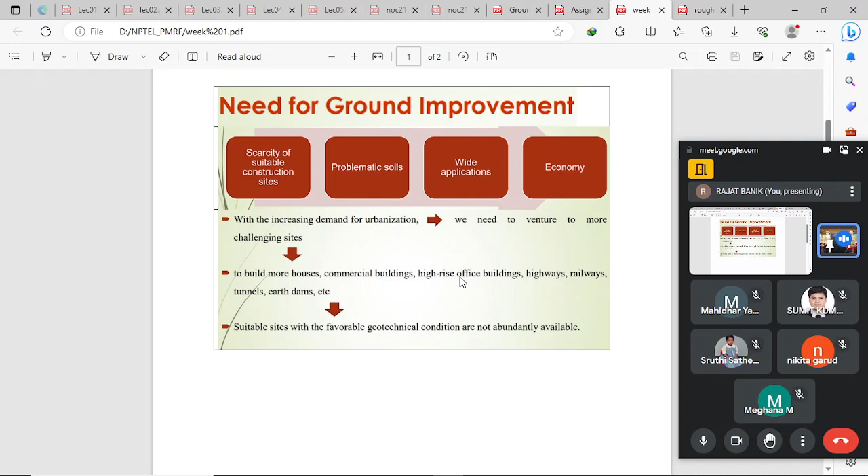For engineering purposes, why do we need ground improvement? Actually, we need ground improvement to increase the mechanical properties of the soil, because some soils do not have adequate mechanical properties. Also, we deal with swelling and shrinkage of soil, collapsible soils, soft soil, organic soil, peaty soils, sandy and gravelly deposits, karst deposits with sink formation, foundations on dumps and sanitary landfills.

We also deal with handling dredge material, handling hazardous materials in contact with soil, and use of minefields. So every problem we face, we can address by ground improvement techniques. We can come to that.

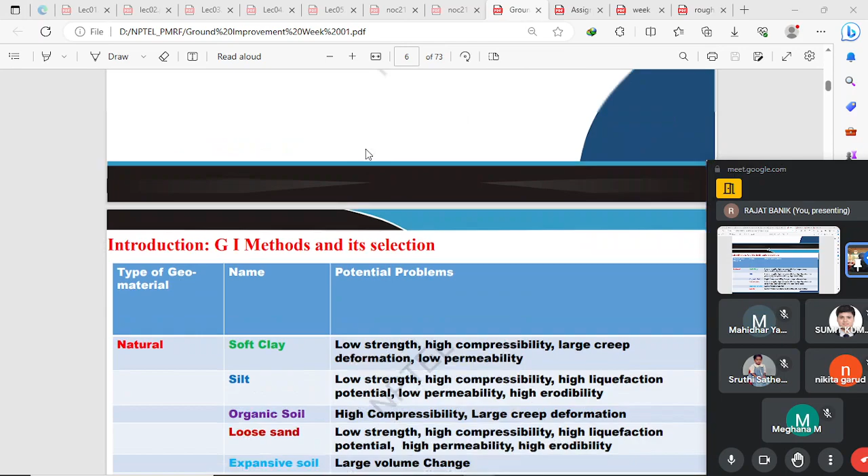Now I am discussing the material which is already shared with you on the NPTEL portal by Professor Dilip Kumar Sir, and I am summarizing this material going through that PPT. First, we can start with the introductory part of ground improvement.

We can see that like every civil engineering material, soil is also one of the civil engineering materials, like steel or concrete. But in the case of soil, it is very dynamic, and it is not properly addressed sometimes. In the case of steel or concrete, we can manufacture it in a laboratory or in the field with quality control technique. But in the case of soil, addressing it is very difficult because it is huge in quantity. So for that, we can use some improvement technique to improve our soil.

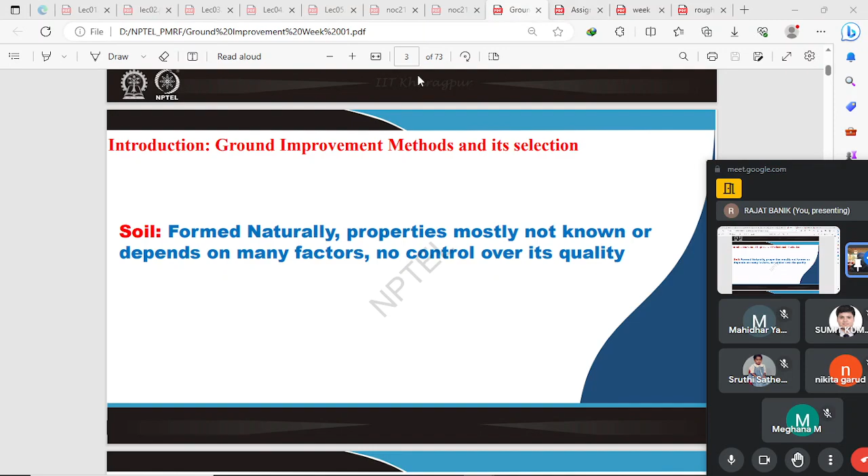Actually, soil forms naturally, and its properties are mostly not known, depending on many factors, with no control over its quality. Here we can see some rock cycle, how soil is formed.

4.5 billion years ago, our earth was in a gaseous stage. After cooling, it went to molten magma. After further cooling, it became igneous rock. With further weathering, it becomes residual soil, and with further heat and pressure, it becomes sedimentary and metamorphic rock. This means the formation of soil depends on different mechanical and chemical properties, so it itself is a dynamic process. So for every different soil, we can use different ground improvement techniques.

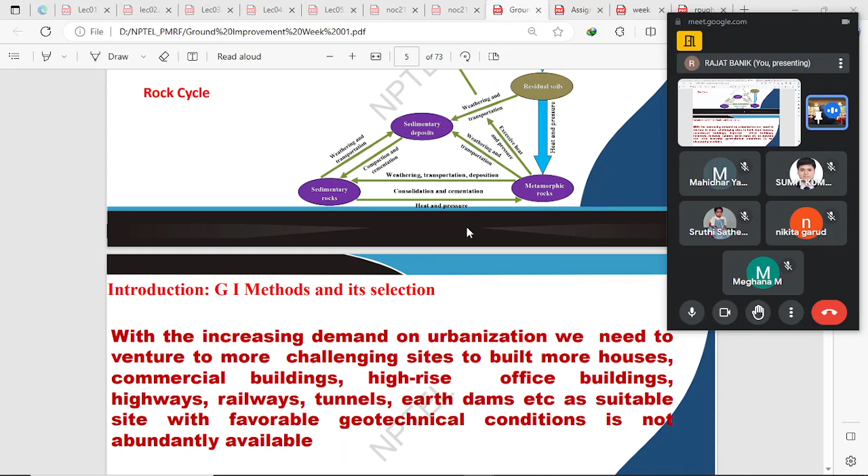Now, why is it needed? As I already told you, with the increasing demand of urbanization, we need to venture into more challenging sites to build more houses, commercial buildings, high-rise office buildings, highways, railways, tunnels, dams, etc. For that, suitable ground favorable conditions are not abundantly available.

Here we discuss some types of geomaterial or soil which is available, or problematic soil, which is addressed by ground improvement techniques. First we discuss natural soil. The naturally available soils which are problematic in ground construction are soft clay, silt, organic soil, loose sand, expansive soil, and loose soil.

What are the major potential problems? This is also discussed here. In case of soft clay, it is very low in strength, high compressibility, large creep deformation, and low permeability. In silt, it is the same: low strength, high compressibility, high liquefaction potential, low permeability, high erodibility.

Organic soil has high compressibility and large creep deformation. Loose sand has low strength, high compressibility, high liquefaction potential, high permeability, and high erodibility.

Actually, this table is very important for your exam purpose and also to solve the assignment problems. Each and every point is very important to solve the assignment.

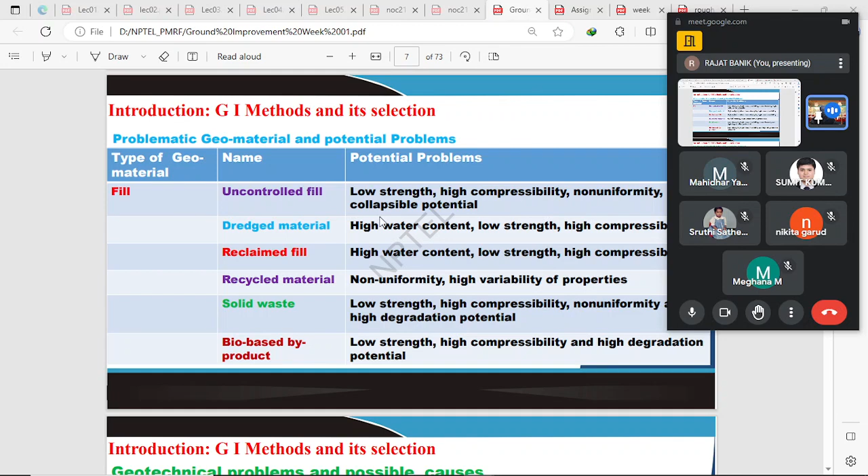There is another problematic geomaterial or soil, that is fill. There are different types of fill material: uncontrolled fill, dredge material, reclaimed fill, recycled material, solid waste, bio-based byproduct.

In uncontrolled fill, the problems are low strength, high compressibility, non-uniformity, and high collapsible potential. In dredge material, the problems are high water content, low strength, and high compressibility. In reclaimed fill, there is also high water content, low strength, and high compressibility.

Recycled material, which is available in abundance, when dumped at a site during construction, creates huge non-uniformity — that is one problem. Then high variability of properties is also one of the problems. In solid waste, which comes from our houses and also from factories and is dumped on a site near which buildings are constructed, this is also going to be a problem. There the problems are low strength, high compressibility, non-uniformity, and high degradation potential.

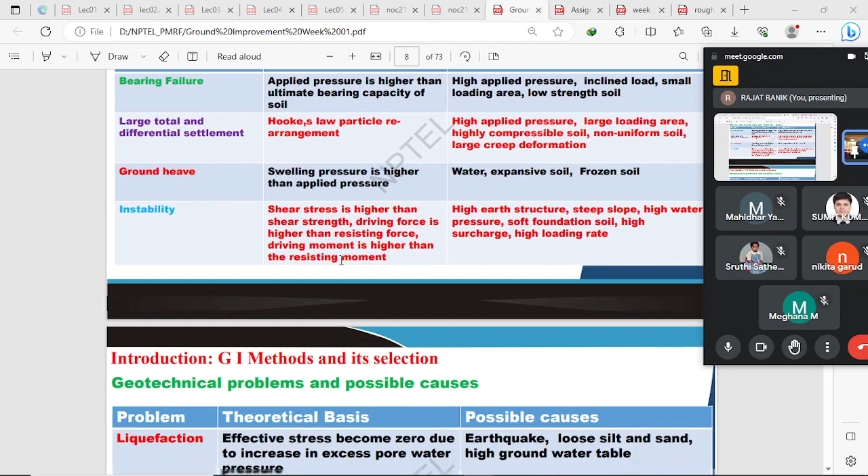The bio-based product also has low strength, high compressibility, and high degradation potential. Moving ahead, there is a table showing the geotechnical problems and their causes, showing the different problems, their overall causes, and the theory behind each problem.

First is bearing capacity failure. This occurs when the applied pressure is higher than the ultimate bearing capacity of soil — that means when the pressure coming from the building is higher than the resisting soil pressure, then failure of the foundation occurs. Some possible causes discussed here are when the applied pressure is very high, the load is inclined, the load is applied on a small area, or the strength of the soil is very low.

Again, other problems are large total and differential settlement. This follows Hooke's law and also the particle rearrangement phenomena. Due to that, volume changes occur and settlements take place. It is caused due to high applied pressure, large loading area, highly compressible soil, non-uniform soil, and large creep deformation. Ground heave takes place when the soil's swelling pressure is higher than the applied pressure.

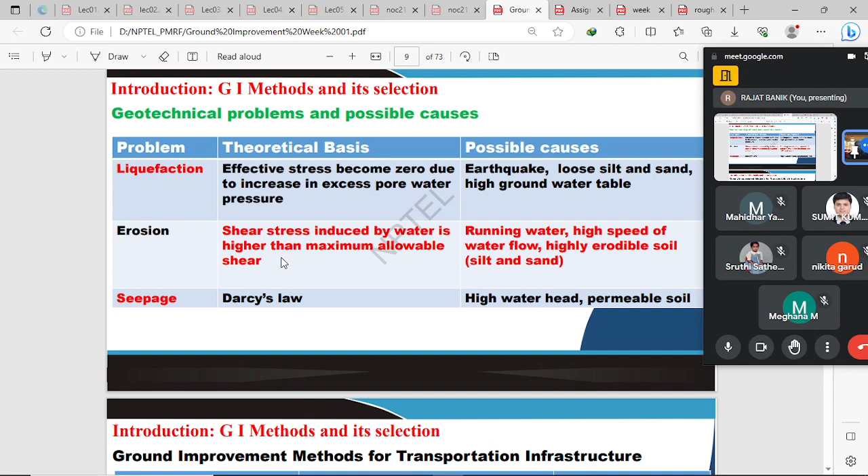There are some techniques used in ground improvement, which is used in transportation infrastructure. These are aggregate columns, waste materials, electroosmosis, micropiles, biotreatment for subgrade, blasting, densification, chemical grouting, and many others, which we will discuss step by step in the next few slides.

Now, in module 2, sir will discuss different classifications of ground improvement methods given by different scientists based on their own criteria. First is given by Mitchell in 1981, based on construction or function criteria. It is categorized into six: in-situ deep compaction of cohesionless soil, pre-compression, injection and grouting, admixture, thermal, and reinforcement.

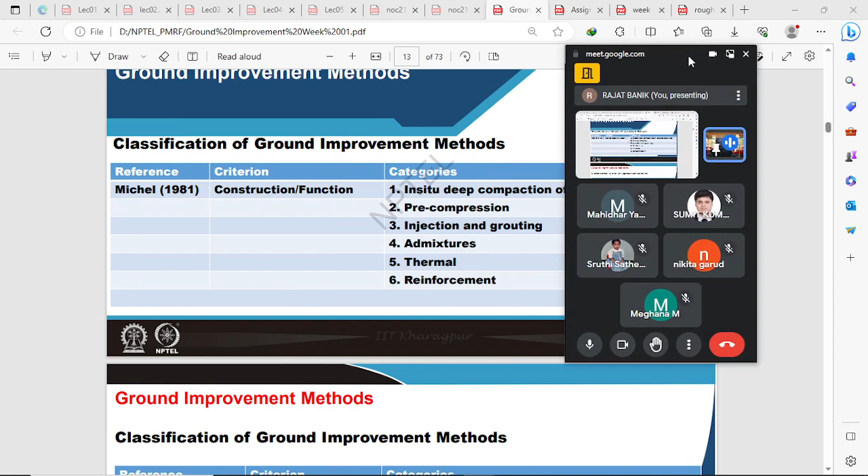More scientists also classified ground improvement methods based on their own process or criteria. That is, Hausmann 1990, based on process. He categorized ground improvement techniques into five: mechanical, meaning we can improve the ground by mechanical energy.

Hydraulic modification, that is, by dewatering or drainage we can improve ground. By physical or chemical modification, we can physically replace the problematic soil with good soil, or by chemical modification through grouting or chemical admixture we can improve the ground, or by some inclusion or confinement, meaning we include rods or reinforcement in the ground to increase the tensile strength of the soil.

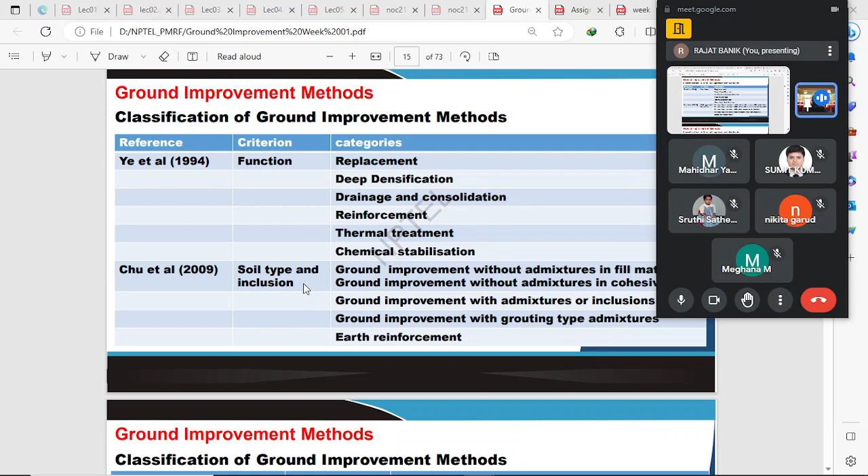Soil is very poor in tension, so we can address this by inclusion and confinement. Further, there are others like Ye et al. and Chu et al. who have also given different ground improvement classifications based on function and soil types, which you can go through and memorize.

Now we can classify ground improvement techniques by our own perception, that is shallow replacement, shallow densification, deep densification, deep replacement, and so on. We can discuss everything step by step.

First, shallow replacement. By the name itself, it is clear that we replace material up to shallow depth. Here in ground improvement techniques, we can replace soil. In shallow replacement, the method is called over-excavation and replacement, which is widely used up to shallow depth. We remove the problematic geomaterial and replace it with good quality geomaterial.

Benefits are increased strength and stiffness, and reduced deformation, liquefaction, collapsible nature of the soil, and ground heave. It is applicable when the replacement depth is up to 3 meters deep, and it can be applied to almost all types of geomaterial.

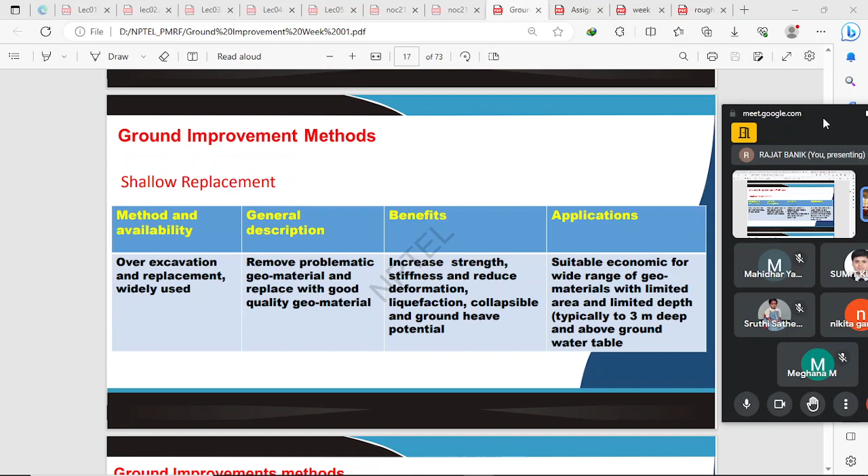Moving ahead, there is another ground improvement classification, that is shallow densification. In shallow densification, there are three methods: one is traditional compaction, which is widely used; another is the high energy impact roller; and the last one is intelligent compaction, which is new and not readily available.

In traditional compaction, we apply static or vibratory load on the ground surface in a certain number of passes. Each pass improves 0.3 meter thickness. Benefits are it increases density, strength, and stiffness, and reduces the permeability and collapsible nature of the soil.

It's suitable, as I told before, up to 0.3 meter depth per pass, and it is normally used only for finishing purposes in roads, mainly for leveling the ground. In the end, if we finish leveling the ground, we can use traditional compaction widely.

In high energy impact roller, we apply a lifting and falling motion of a roller with high energy impact. Due to the high energy, the ground surface is densified, compacting the problematic geomaterial. The benefits are similar to traditional compaction, but the improvement depth is higher.

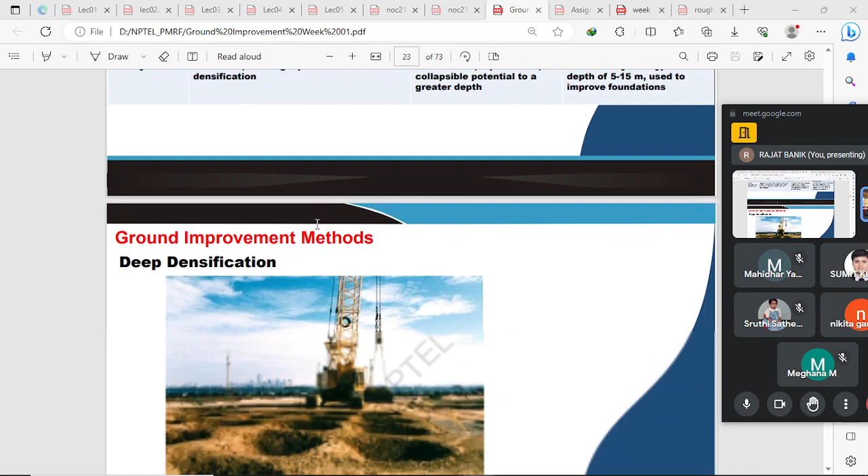Moving ahead, there is another classification: deep classification, deep densification, or dynamic densification. In deep densification, there are dynamic compaction, vibrocompaction, and also sand compaction column and stone column.

So let's start with dynamic compaction. Each of these techniques which I am going to discuss here is elaborately discussed in a further module. So don't worry, here I am discussing only the gist of these techniques, in a small way for understanding purpose. Each technique we will discuss elaborately in further classes. So don't worry, and now let's start with dynamic compaction.

In dynamic compaction, we actually drop a heavy weight from a high distance, and due to the heavy weight at a high distance, high energy is produced, which improves the ground at a deeper depth. Due to high energy, it can cause liquefaction of saturated soil and problematic geomaterial, and densify and settle down the unsaturated geomaterial.

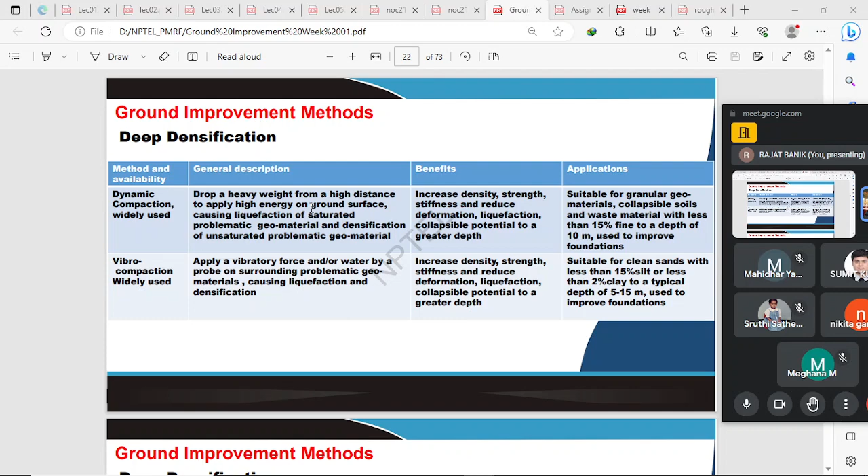Moving forward in module 3, we can discuss other densification techniques: sand compaction column and stone column. In sand compaction column, we displace the problematic geomaterial by driving a casing into the ground and backfill it, compacting by vibration or other means with sand.

The benefits are a little bit different from previously told: here we increase the bearing capacity of soil, stabilize the soil, and also reduce settlement and liquefaction of the ground. It is suitable for a wide range of geomaterial, to a typical depth of 5 to 15 meters, used to improve the sand foundation.

It is the same depth as told for vibrocompaction, 5 to 15 meters improvement depth. In stone column, we actually construct the stone column by jetting air or water to remove or displace the problematic soil in the ground using a probe, and backfill the hole with stone or other heavy material, densifying the column and the soil by vibration.

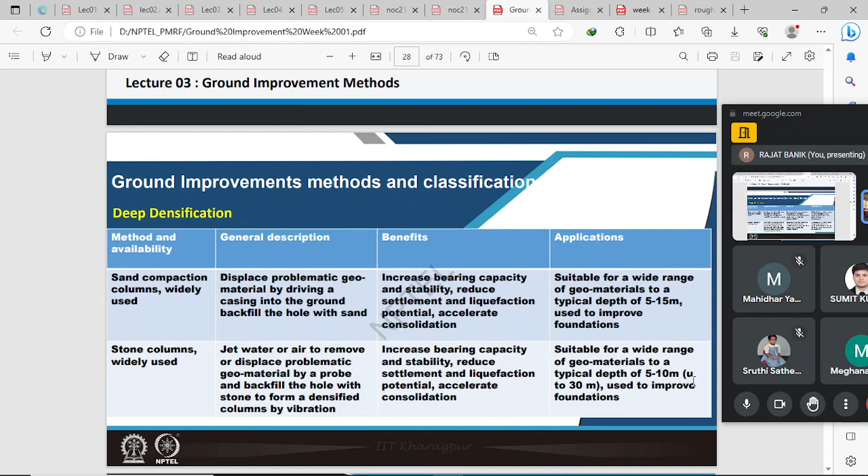The stone column is suitable for a wide range of geomaterial, to a typical depth of 5 to 10 meters, and can go up to 30 meters, improving the foundation. Moving further, we can see the method of how the stone column is constructed in the field. Here you can see there are two types.

Here we see there are two techniques: the wet top feed method or the dry bottom feed method. Here it is only shown the dry bottom feed method.

In the dry bottom feed method, step one, we penetrate the probe and then install the aggregate through the separate duct along the vibro probe, vibrating the probe with high frequency, 30 hertz to 60 hertz, which is greater than the natural frequency of the soil, so the soil is easily displaced and compacted, with volume change and compaction.

Also, due to this stone column, consolidation takes place because the stones are permeable in nature, so water can easily pass through or seep out of this column.

Now, like dynamic densification, there is another technique called deep replacement, which is a little bit similar to deep densification. There are two methods discussed here: one is rammed aggregate column, the other is geosynthetic encased column.

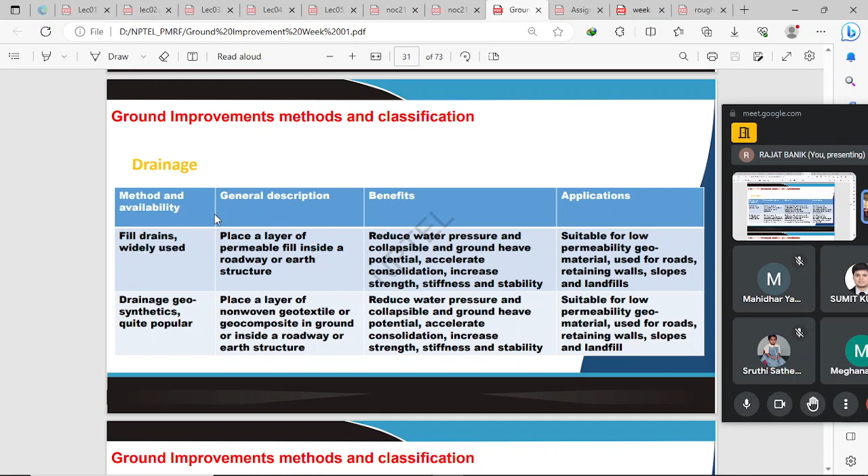Moving ahead, there is another classification based on dewatering. It is similar to drainage, but in dewatering we use extra force to pump out or seep out the water. There are two techniques discussed here: one is open pumping, another is well systems.

In open pumping, we use pumps and trenches to pump out a small amount of water up to a shallow depth in open excavation.

The benefit of pumping out water is that it lowers the groundwater table. By lowering the groundwater table, we increase the effective stress, and due to the increased effective stress, we increase the bearing capacity of the soil. So it also increases the strength of the soil, and benefits the construction technique—we can easily construct once the water is removed.

The pumping out technique is only suitable for small areas and relatively impervious soil, lowering the groundwater table up to a limited depth, because when we use open pumping we apply small energy, so it works only for a small depth. We cannot go for deeper dewatering.

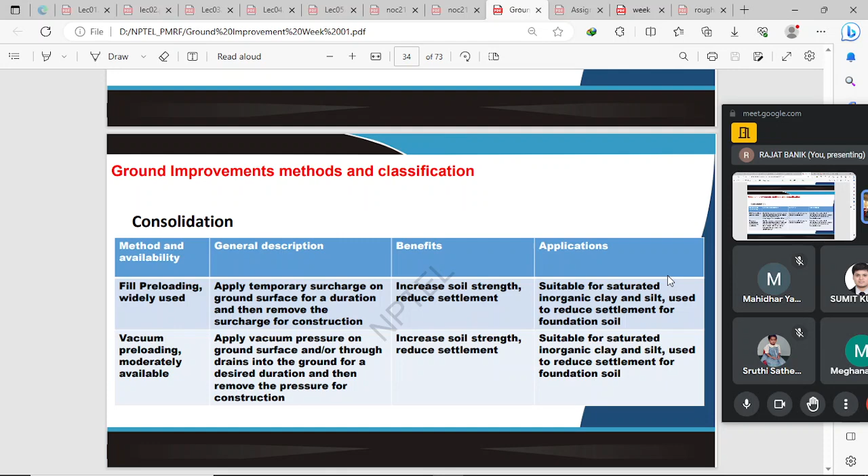Moving ahead, here we can see a schematic diagram of the preloading technique. Here we see that the ground was previously up to this much level, as shown by my arrow.

After applying the preloading, the ground is settled down and comes to that level. After settling down, we can fill the ground with good material, apply traditional compaction technique, and level the ground. Further construction techniques are applied, and it is suitable for construction.

Moving ahead, we can see another classification: shallow chemical stabilization. By the name itself, we understand that chemically we can stabilize the ground. Chemical stabilization is done by mixing lime, cement, or fly ash with the subgrade and base course in the field, then compacting the mixture to have a chemical reaction with the soil and form a cementitious matrix. Its benefits are increasing strength and stiffness and reducing the ground heave potential. It is suitable for unsaturated clay and silt, mainly used for roadway construction with a typical lift thickness of 0.3 meter, meaning it can improve the ground up to 0.3 meter.

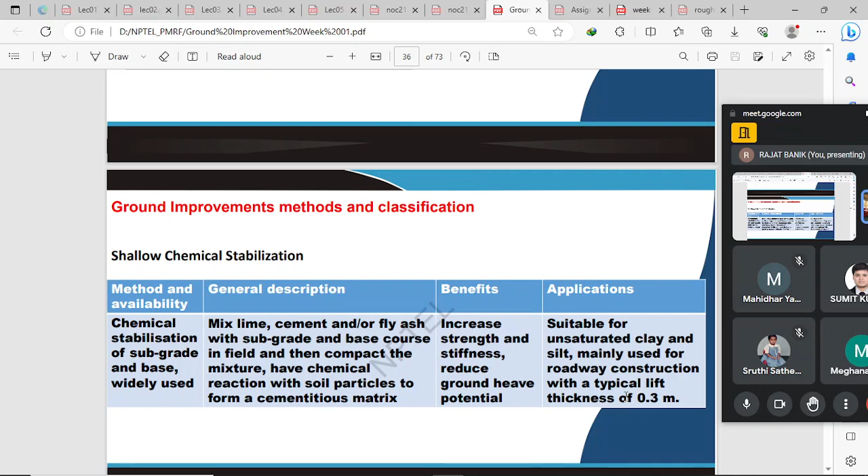So by the name itself, shallow means the improvement zone is limited to up to 0.3 meters. Moving ahead, there is deep chemical stabilization. In deep chemical stabilization, we go for grouting, a well-known technique, and also deep mixing. In grouting, we inject the grout into the ground to fill the voids and densify the soil, which has a chemical reaction with the soil particles to form a hardened mass. Its benefits are increased strength, reduced permeability, reduced liquefaction, and ground heave potential. It is suitable for different ground geometries, mainly used for remedying measures to protect projects.

In deep mixing, we mix cement or lime from the surface to depth with geomaterial by mechanical blending to have a chemical reaction with soil particles, and after mixing they form a cementitious matrix. Benefits are increased strength, stiffness, and stability, and reduced permeability, liquefaction, and ground heave potential. It is suitable for a wide range of geomaterials, mainly used for foundation support, earth retaining during excavation, and liquefaction mitigation.

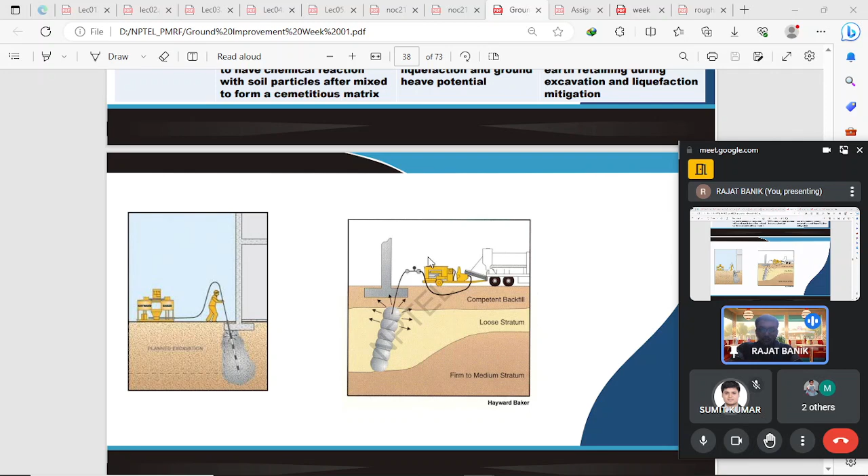Let's resume our lecture. We were discussing different ground improvement classifications or techniques. Further, in module 4, we can discuss other ground improvement classifications based on fill reinforcement.

In fill reinforcement, there are two techniques used. One is geosynthetic reinforced slope, and another one is geosynthetic reinforced embankments.

In geosynthetic reinforced slope, we place a geosynthetic material in a slope at different elevations during fill placement to provide tensile resistance. Its benefits are increased stability, and it is suitable for low plasticity fills, mainly used for slope stability.

In geosynthetic reinforced embankments, we place high strength geosynthetic at the base of the embankment to provide tensile resistance. Benefits are increasing bearing capacity and stability. It is suitable for embankments over soft soil, mainly used for enhancing embankment stability.

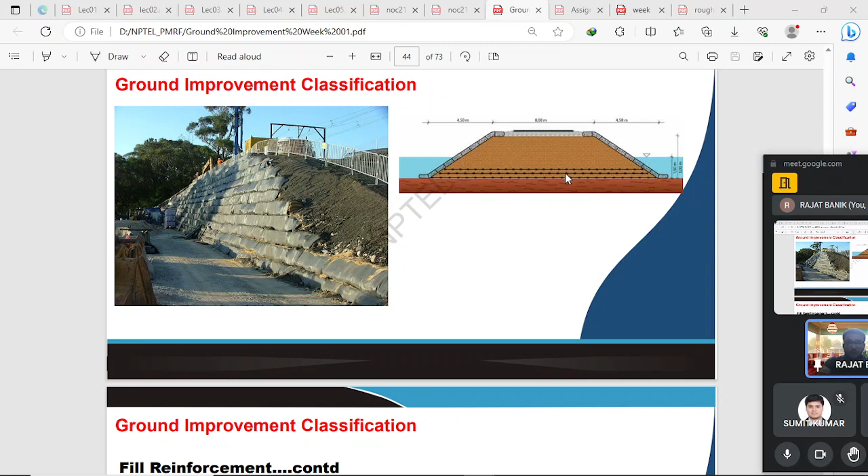Further, other fill reinforcements are mechanically stabilized earth walls and geosynthetic reinforced roads. In mechanically stabilized earth wall, which is quite popular and widely used, we place geosynthetic or metallic reinforcement in the wall at different elevations during fill placement to provide tensile resistance.

It increases stability and is suitable for low plasticity, free draining fills. That means it is not suitable for clay and silt, which are quite plastic in nature.

In geosynthetic reinforced road, we place geosynthetic reinforcement on a subgrade or within the base course to provide lateral constraint. Its benefits are increasing bearing capacity and reducing deformation and base thickness requirement. It is suitable for granular base over soft subgrade.

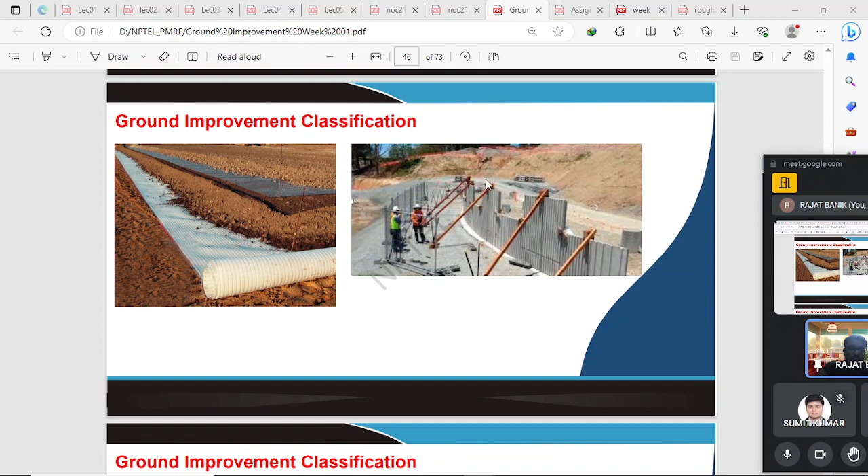Here it shows two pictures. One is geosynthetics used for roads, another one is geosynthetics used for retaining walls.

Another type of classification is in-situ reinforcement. In in-situ reinforcement, we use two types of techniques: one is soil nailing, which is quite popular, and another one is micropiles.

In soil nailing, we insert a steel bar with grout throughout the whole nail into the existing ground to provide tensile resistance and prevent ground movement. It increases stability and is suitable for low plasticity, stiff to hard clay and densified granular soil, mainly used for temporary and permanent slopes and walls during excavation.

In micropiles, we insert a steel reinforcement bar in a bored hole and grout it in place to form a small diameter pile, less than 0.3 meter, providing vertical and lateral capacities.

Benefits are it increases stability and protects existing structures during ground movement. It is suitable for a variety of geomaterials, used for slopes, walls, and underpinning of existing foundations.

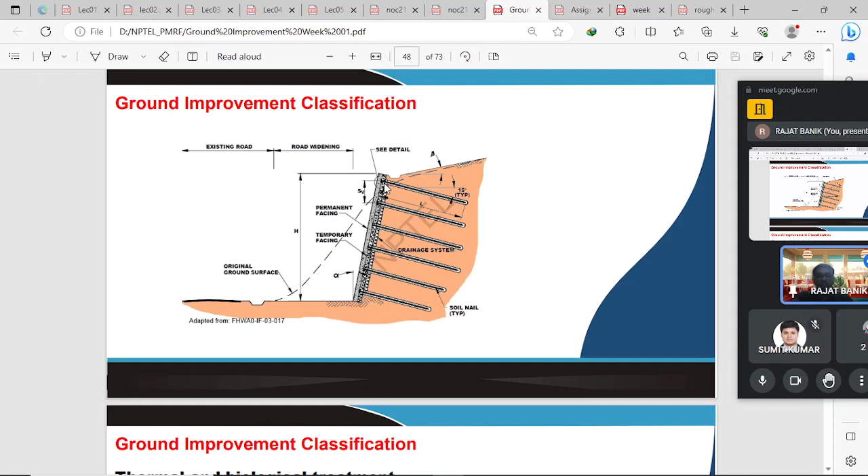Moving ahead, another classification is thermal and biological treatment. Thermal techniques are not widely used; occasionally it is only used when required to tackle the ground.

In ground freezing technique, we remove heat from the ground to reduce the soil temperature below freezing point and turn the geomaterial into solid. Benefits are increased strength, reduced water flow and ground movement. It is suitable for temporary or protection work during excavation, and also suitable for saturated clay and sand.

Another one under thermal and biological treatment is biological treatment. It is used by utilizing vegetation or roots, which control soil erosion. So it can increase the shear strength of the soil or change the soil property by biological means.

Benefits are it increases the strength and stiffness of the soil, reduces the erodibility or erosion of the soil, and reduces the liquefaction potential. It is suitable for cohesive and cohesionless geomaterial. It requires more research and field trial before it is adopted in practice.

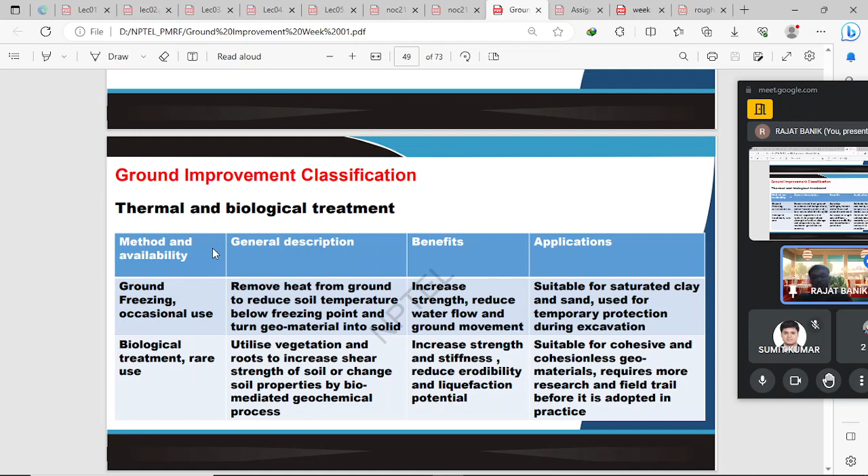Now we go to the selection method. How can we select the method, when it is required, and how it is utilized for our construction. First, we see that the building is constructed in normal soil. If the soil is good enough to take the weight or load from the building, then we don't go for ground improvement technique. Only a simple shallow foundation can solve the problem.

If ground is not good, then second is replacing the ground. This technique is used when the replacement of problematic soil is in shallow depth. So we can replace the soil and input good material to increase the strength of the soil, so the building load can be resisted.

Further, if that is not sufficient, then we go for the compacted or consolidated ground technique. In this technique, we compact the soil which is below the foundation level, and we construct the building over it.

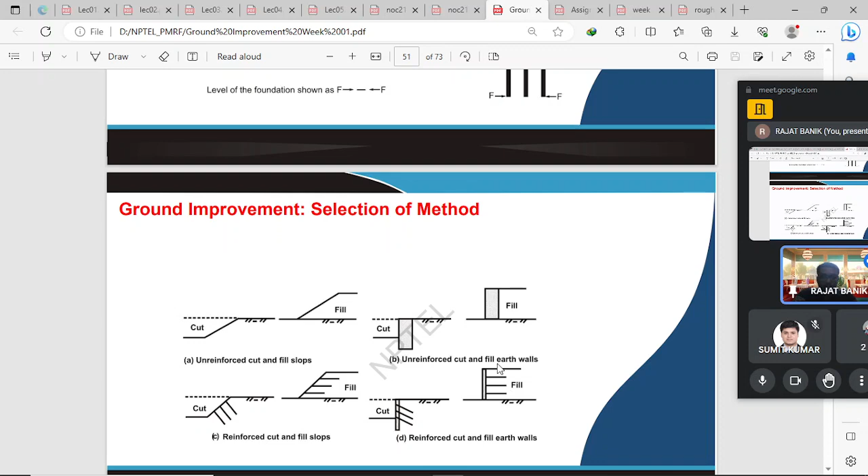Now moving ahead, there are some factors which ground improvement techniques depend on. These are structural, geotechnical, sometimes environmental, sometimes construction constraints, and sometimes reliability and durability.

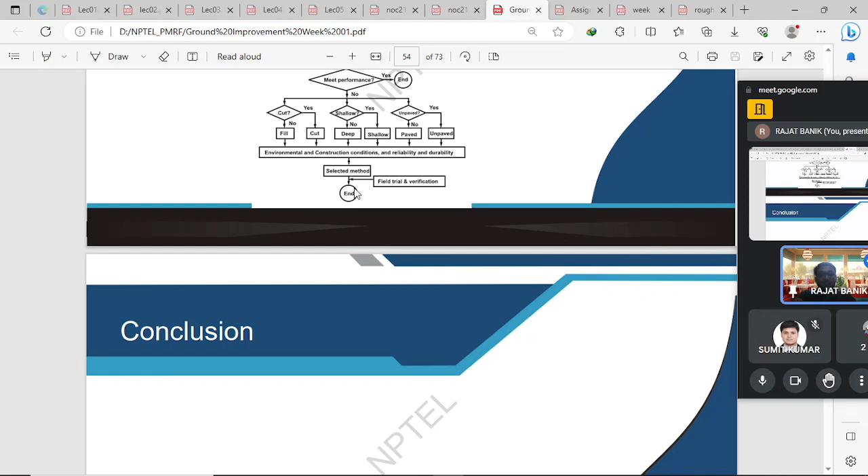Lastly, we can also go for environmental and construction conditions, and also check our construction with reliability and durability. If all are suitable, we can select our technique. After selection of our technique, we go for some field trials or validation or verification. After verification or field trials, we end, and further construction goes on.

It is the end of the fourth module. Now we come to the fifth module. From the fifth module onwards, we will discuss elaborately the different ground improvement techniques which I discussed previously, like excavation.

We start with the excavation and replacement technique. As we previously discussed, this excavation and replacement technique is used up to 3 meter depth, and it is only suitable for shallow depth, and also suitable when the groundwater level is very deep, that means the groundwater level is not close to that 3 meter depth.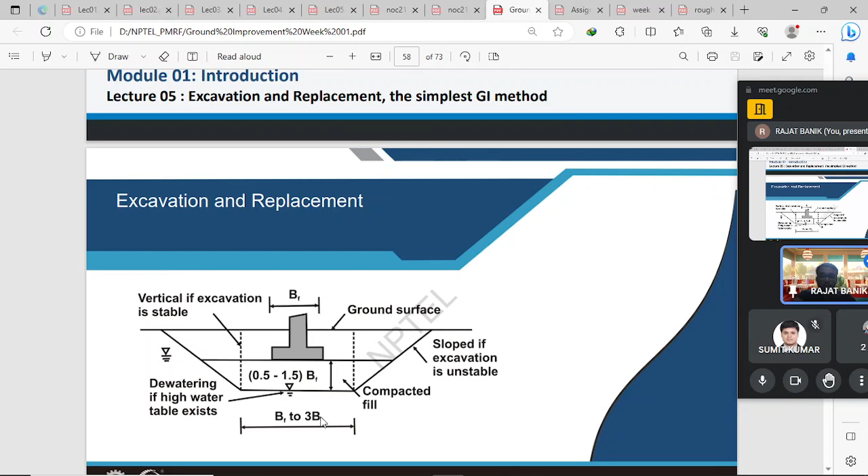Moving ahead, why it is used and what is the application of the excavation and replacement method. It is used for improving shallow problematic geomaterials like uncontrolled fill, loose sand and silt, soft soil, expansive soil, liquefiable soil, frozen soil. Excessive deformation and potential bearing failure occur due to low strength during service.

It is used when the area of over-excavation is limited, meaning the depth or area of construction is quite limited. It is also suitable when the depth is less than 3 meters, and when the water table is quite deep, with limited or no temporary shoring or dewatering required.

It is also frequently used when no existing structure is close to the excavation area, and the removed soil can be easily disposed of or reused, or when fill material is readily available.

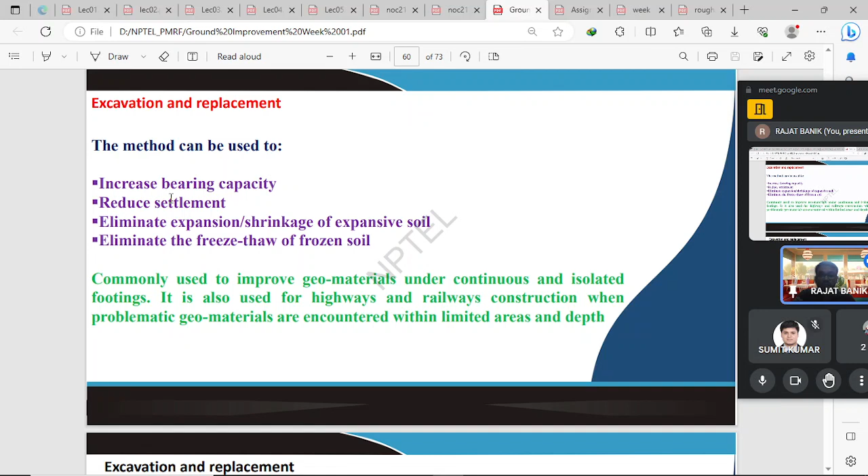This method is beneficial to increase the bearing capacity, reduce settlement, eliminate expansion or shrinkage from expansive soil, and eliminate freeze-thaw issues from frozen soil. This method is commonly used to improve geomaterials under continuous or isolated footing, and also for highways or railway construction when problematic geomaterials are encountered within limited areas and depth.

Here some advantages and disadvantages are discussed. Advantages are: it is often cost effective when the area and depth are limited, fill material is readily available, and it is simple, reliable and well established, not requiring specialty contractors or special equipment except an excavator and roller.

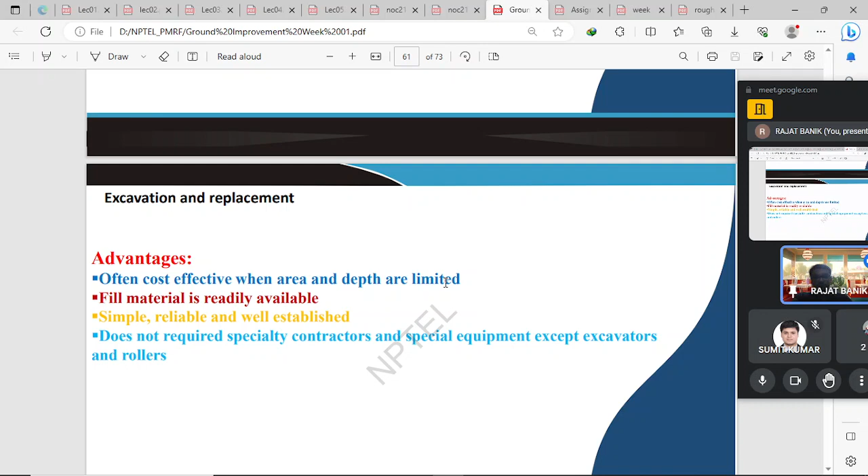It has more disadvantages than advantages. The method is unsuitable when deep excavation is required, when there is a high groundwater table, when there is presence of on-site or nearby existing structures or utility lines, or when there is limited track access or the site is inaccessible.

It is also unsuitable when the distance is long for hauling fill material or disposing of excavated soil, since that increases construction cost due to the long distance. It is also unsuitable when time is limited, meaning this method is not suitable for quick construction.

Here is described the principle of this technique. This technique is used for partly or fully replacing the problematic soil by good soil, sometimes complete replacement. Partial replacement is acceptable and more economical as long as the performance of the structure is satisfactory on the partially replaced zone. For expansive soil, which may undergo volume change, or for frozen soil, which also undergoes volume change depending on temperature, it should be greater than the active depth of the problematic soil.

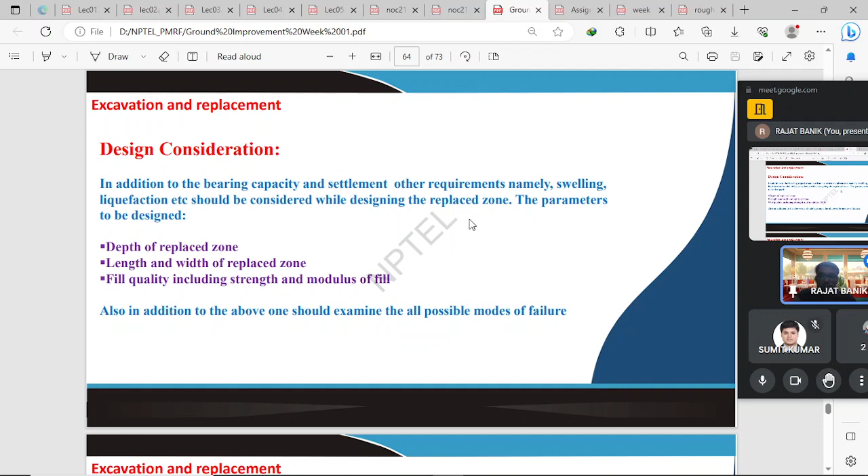Now we discuss the failure modes: what type of failure occurs in this technique. These are general shear failure within the replaced zone, punching shear failure within the replaced zone, distributed failure through the replaced zone, and punching failure of the replaced zone into the underlying weak soil.

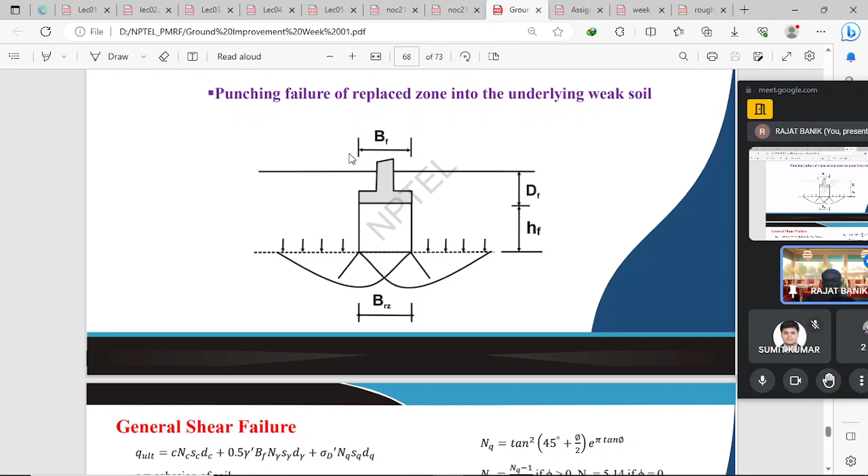To find the bearing capacity of this problematic or replaced zone, we can use the normal general shear Terzaghi bearing capacity formula: Q ultimate equals C·Nc·Sc·Dc plus 0.5·gamma dash·B·F·N gamma·S gamma·D gamma plus sigma D dash·Nq·Sq·Dq, where C is cohesion of soil, Q is ultimate bearing capacity, gamma dash is effective unit weight of soil, sigma D dash is effective overburden, Nq, N gamma and Nc are bearing capacity factors, Sc, Sq, S gamma are shape factors, and Dc, Dq, D gamma are depth factors.

Here is given the bearing capacity factor formula, you can go through it. We can also see that at different friction angles, that is the internal soil-to-soil friction angle, we can define different shape factors: Sc, S gamma, Sq. For 0 degree, Sc equals 1 plus 0.4 times BF by LF, where BF is the width of the foundation and LF is the length of the foundation. For 0 degree, Sq and S gamma are 1. Similarly for other angles, we can define from the formula.

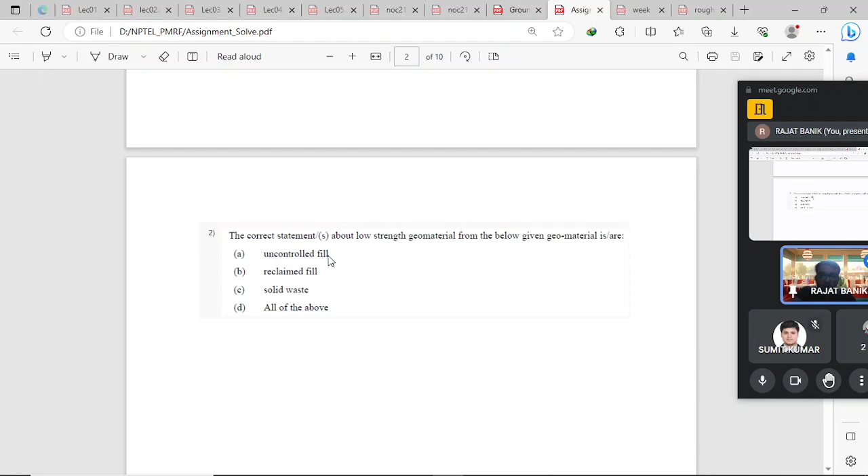Moving to the next question: the correct statements about low strength geomaterial from the given options. Option A is uncontrolled fill, B is reclaimed fill, and C is solid waste. We need to find the low strength geomaterial from these options. Going through the same slides, we see that uncontrolled fill, reclaimed fill, and solid waste all have low strength. So the correct option is D, all of the above, since low strength occurs in all the fill materials given here.

Moving to question 3: sand compaction columns are typically installed by which technique? First option: excavating the soil and replacing it with compacted sand. Second: injecting sand slurry into the ground using high pressure jets. Third: vibrating a probe or casing to create a column of compacted sand. Fourth: mixing sand and cementitious grout to form a solid column. As we can see, sand compaction column is one type of ground improvement technique, and the correct option relates to vibrating a probe or casing to create the compacted sand column.

It is classified under the deep densification technique. You can see that the sand compaction column is constructed by displacing the problematic soil geometrically, by driving a casing into the ground. That means the casing is driven into the ground and then backfilled with soil or sand and compacted.

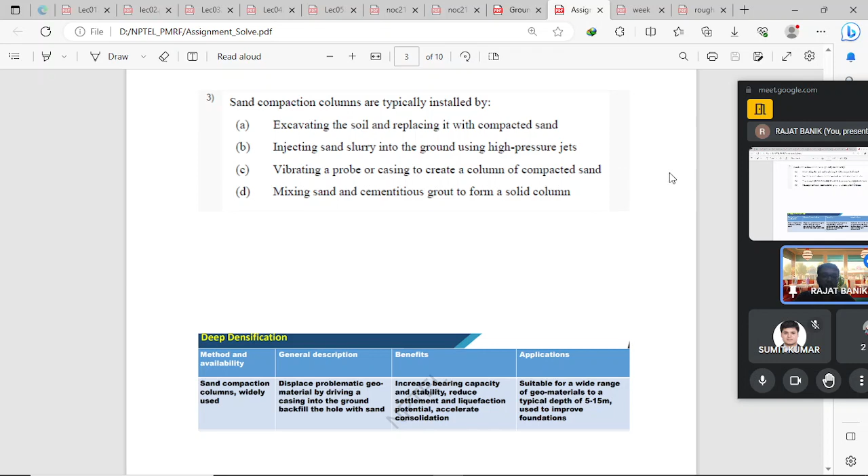Moving to question four: find out the cause of instability of slope in the soil. The options given are: first, driving force is higher than the resisting force; second, shear stress is equal to shear strength; third, driving force is lesser than resisting force; and fourth, all of the above.

This question's answer is given in this slide. We find it in the geotechnical problems and possible causes slide, where different types of problems are given. One problem is instability. In the instability row, we find that instability occurs when shear stress is higher than shear strength, or when driving force is higher than resisting force, or when driving moment is higher than resisting moment.

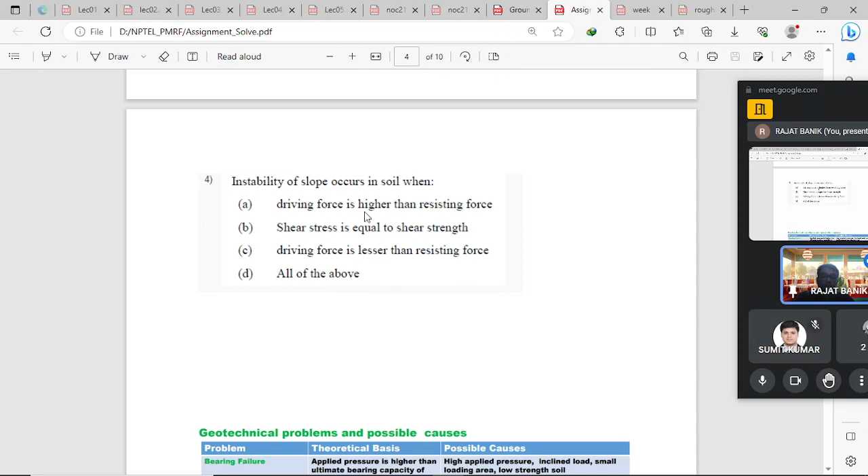So in option one, it says driving force is higher than resisting force, which is correct. In option two, it says shear stress is equal to shear strength, which is not correct because the condition is shear stress higher than shear strength, not equal, so option B is also not correct. Option C says driving force is lesser than resisting force, which is also not correct. So the correct answer is: instability of slope occurs when driving force is higher than resisting force, that is option A.

Moving to question five in the assignment problem: find out the use of high impact roller -- when can we use the high impact roller. The options given are: option A, increased deformation; option B, increased permeability; option C, increased strength and stiffness; and option D, all of the above.

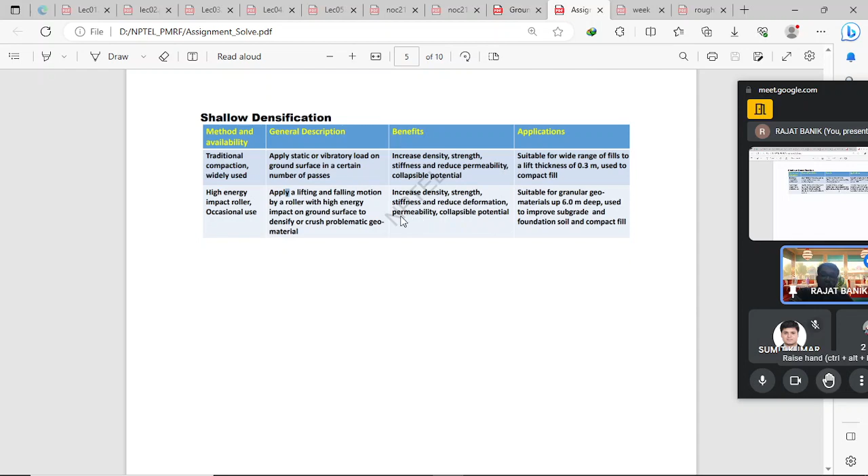To address this question, we go to the shallow densification technique. In shallow densification technique, there are three types discussed: traditional technique, high energy compaction technique, and intelligent compaction technique. In high energy compaction technique, we go to the benefits column, where benefits include increased density, increased strength, increased stiffness, and reduced deformation, reduced permeability, and reduced collapsible potential.

From the options, option A says increase the deformation, but the benefits column states reduce the deformation, so option A is not correct. Option B says increase the permeability, but it states reduce the permeability, so option B is also not correct. Option C says increase the strength and stiffness, and the benefits column confirms increase the strength and stiffness, so option C is correct. So the correct answer is option C.

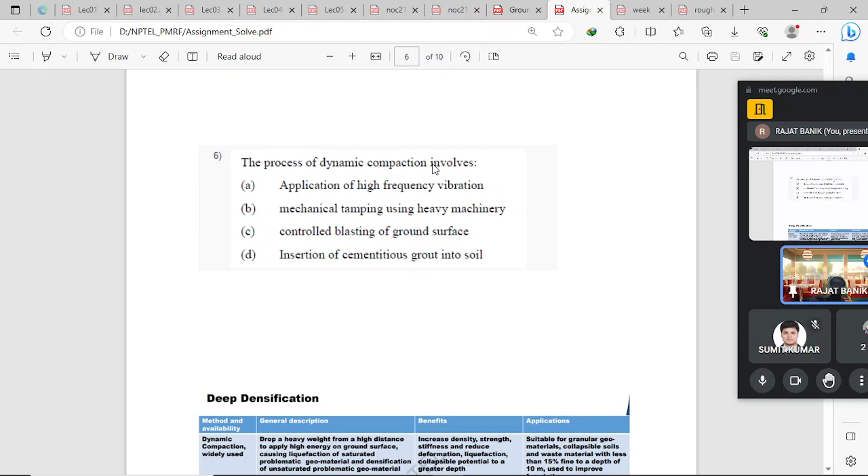Moving further, question 6: find out the process of dynamic compaction, that means what is involved in dynamic compaction. To address that, we go to the deep densification method classification.

First option is application of high frequency vibration. Second option is mechanically tamping using heavy machinery. Third option is control blasting of ground surface. Fourth option is insertion of cementitious grout into the soil.

In deep densification there is deep dynamic compaction, which is done using a heavy weight hammer dropped from a high distance to apply high energy on the ground, causing liquefaction of the saturated problematic geo-material or densifying the unsaturated problematic geo-material.

In option A, it is said that application of high frequency vibration. It is not related to dynamic compaction, so option A is not correct.

Option C says control blasting. It is also not related to dynamic compaction, so option C is also not correct.

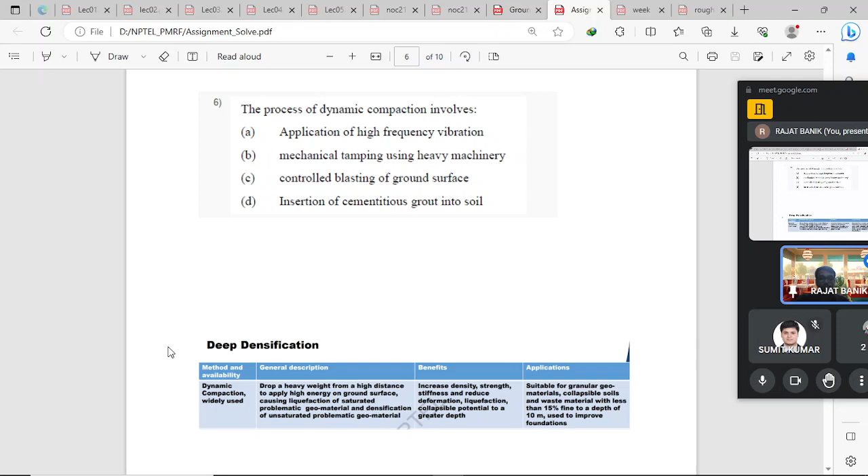Here different suitability, advantages, and disadvantages of this excavation replacement method are discussed. It is said the disadvantage is that it is not suitable for deep excavation and also not suitable for high groundwater table. So in this question, the correct answer is both A and B, meaning not suitable for deep excavation method and also not suitable for high groundwater table. So the correct option is option C.

Moving to question 8: find out the possible failure modes of foundation to examine during the excavation and replacement method. What are the possible causes of failure modes in this method? The options given are: general failure within the replaced zone, punching failure of replaced zone into the underlying weak soil, distributed failure throughout the replaced zone, and option D, all of the above.

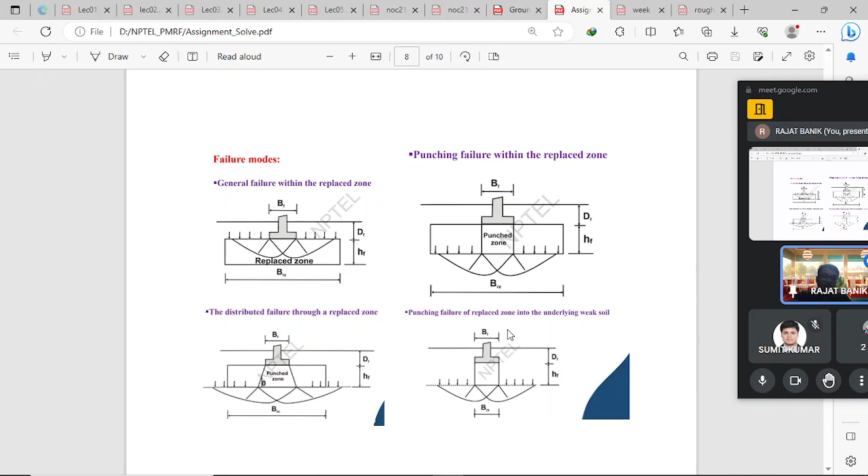So the correct answer here is D, option D, all of the above. That includes general failure, punching failure, and distributed failure. So the correct answer is option D.

Now we come to question number 9 of the assignment. A real field problem is given: a project site has a 5.5 meter thick loose gravel layer near the ground surface that needs to be improved for foundation support. We need the method most suitable for improvement of the site. Few methods are given: option A is open pumping, option B is dynamic compaction, option C is traditional compaction method, and option D is none of the above.

Option A, open pumping, is quite related to dewatering the ground or lowering the groundwater table. But our problem is not related to the groundwater table or groundwater saturation, so option A is not correct.

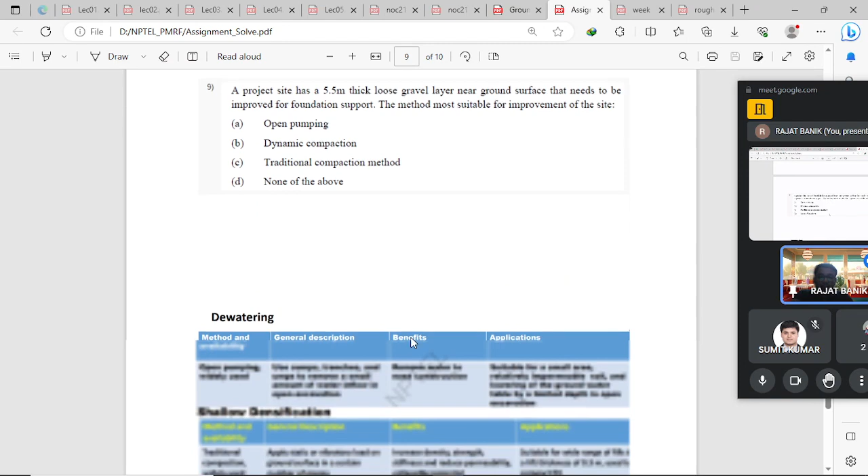Option C is a little bit usable, but only up to 0.3 meter. In shallow densification, the traditional method is used up to 0.3 meter depth, meaning it improves only up to 0.3 meter. But in our problem we have to address a 5.5 meter thick layer, so the traditional compaction method cannot improve or replace this 5.5 meter thickness of ground.

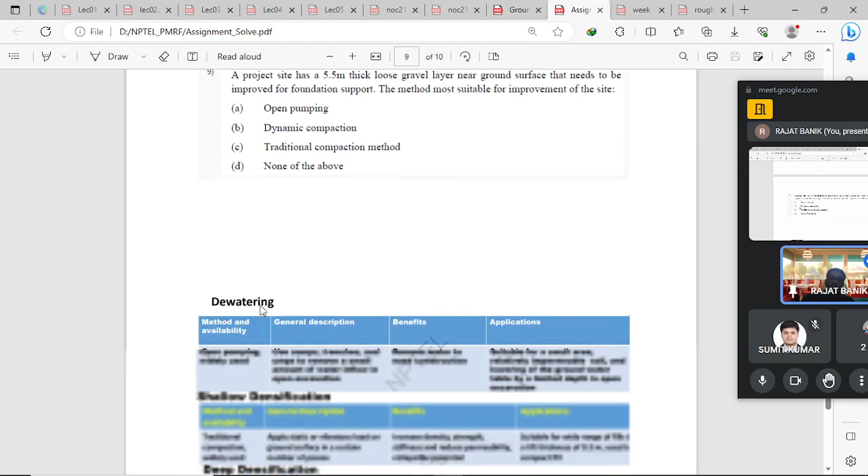So the option is B, dynamic compaction. If we go to the deep densification classification, we find that dynamic compaction can improve soil up to 10 meters. Since our problem is only 5.5 meters, we can easily use this technique.

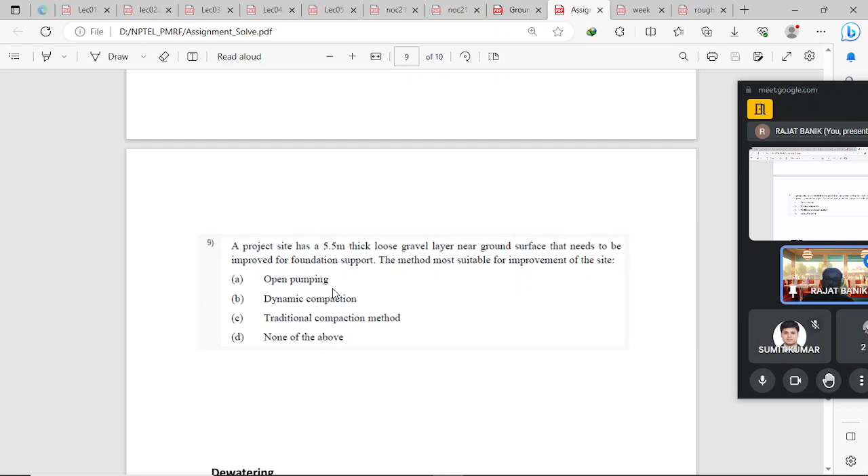The correct answer for this problem is dynamic compaction. This correctly addresses the 5.5 thick loose gravel and improves the soil for foundation support.

The last assignment problem is related to the general shear bearing capacity formula. Find out the shape factor value for the angle of internal friction, phi dash equal to 0 degrees. A few options are given: first, SQ and S gamma equal to 0; second, S gamma and SQ equal to 1; third, SQ and S gamma equal to 1.1; or fourth, none of the above.

To address this question, go to the last lecture of this module. We find the general shear failure formula, Q ultimate equals C Nc Sc dc plus 0.5 gamma BF N gamma S gamma D gamma plus sigma dash Nq Sq Dq. Here, when phi is equal to 0, we find that Sc equals 1 plus 0.2 times BF by LF, where BF is the width of the foundation and LF is the length of the foundation. And for phi equal to 0, Sq is equal to 1. So the correct answer is option B — you can easily see that SQ and S gamma equal 1.

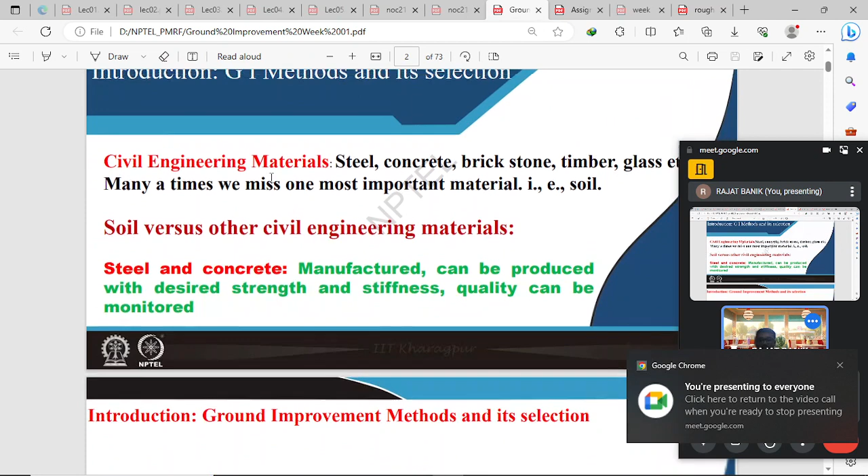In lecture one, sir discussed the different types of civil engineering materials, and soil is one of the civil engineering materials, and it is difficult to handle. So we can use different types of ground improvement techniques. We also discussed how soil is formed from rock through different wear and tear, weathering, heat, temperature, and pressure. By this, soil is formed.

Then we discussed why ground improvement technique is needed — because a suitable site is not available.

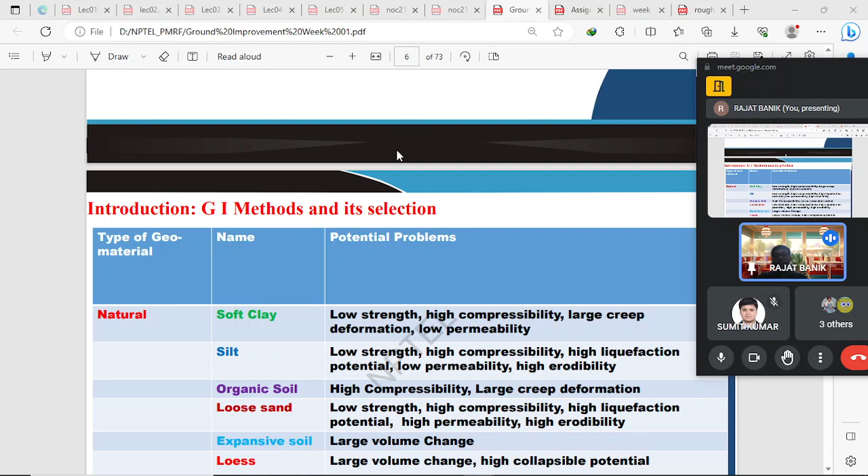Then we discussed different types of problematic soil naturally available, like soft clay, silt, organic soil, loose sand, expansive soil, and what their problems are.

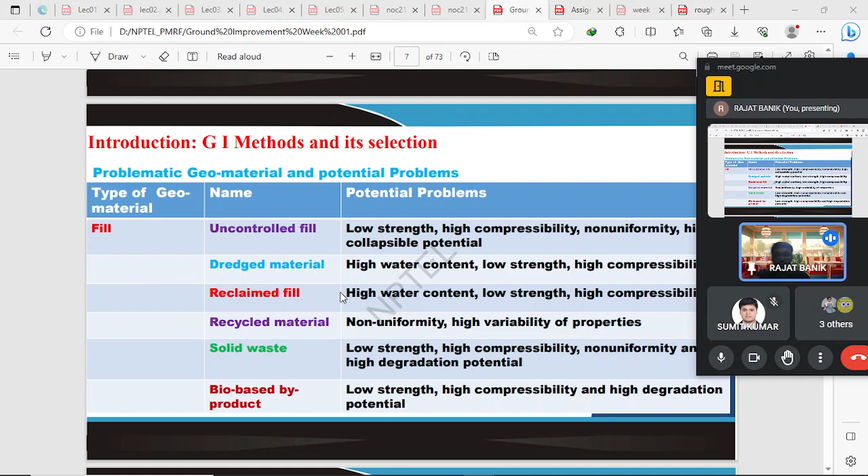We also discussed different types of fill, such as uncontrolled fill, dredged material, reclaimed fill, recycled material, solid waste, bio-based by-products, etc., and their different types of problems.

Then we discussed different geotechnical problems and possible causes, which are bearing capacity failure, instability, ground heave, large total and differential settlement, etc., what the possible causes are, and what theory is based on it.

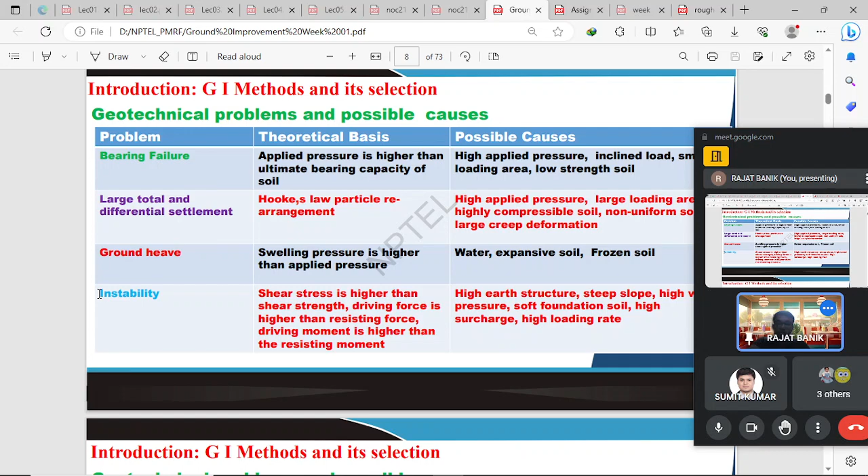We also discussed liquefaction — why liquefaction happens, why erosion occurs, and why seepage occurs, what theoretical background they're based on, and what the possible causes are.

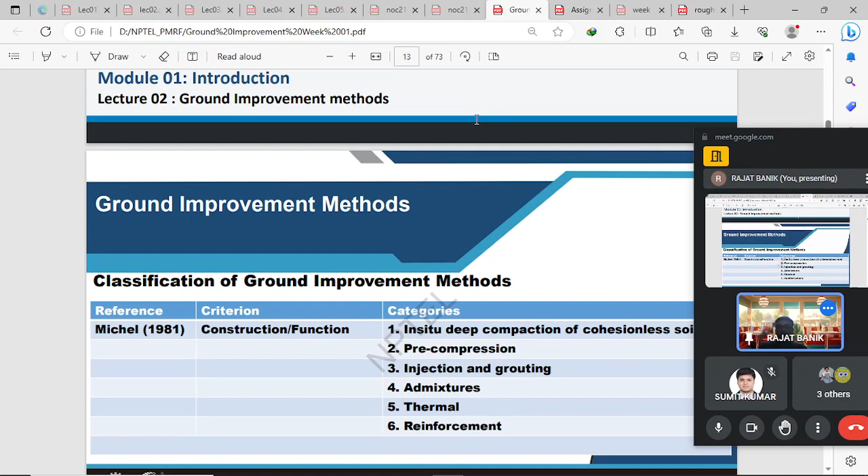Further, in lecture 2, we discussed the classification given by different scientists, like Mitchell, based on different criteria. Mitchell's is based on construction function and processes, while another is based on soil type and inclusion.

Further, we classified ground improvement methods based on our own framework: shallow replacement, shallow compaction densification, deep densification, deep compaction, deep replacement, thermal compaction, biofield methods, grouting, shallow and deep chemical stabilization, soil inclusion, etc.

Under shallow replacement, we discussed the over-excavation or replacement method, and also discussed how it is done, and what the benefits and implications are.

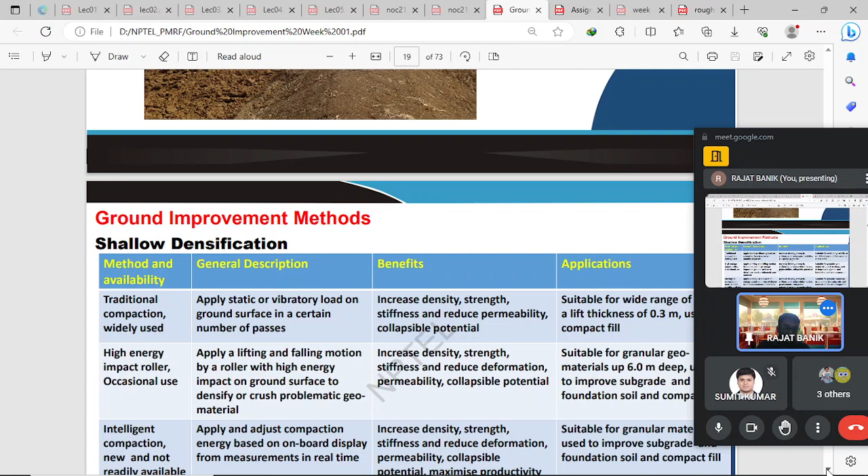In shallow densification, we discussed three types of techniques: traditional compaction method, high energy impact roller method, and intelligent compaction method. Among these, the traditional compaction method is widely used and most popular, mainly used to level the ground or for finishing.

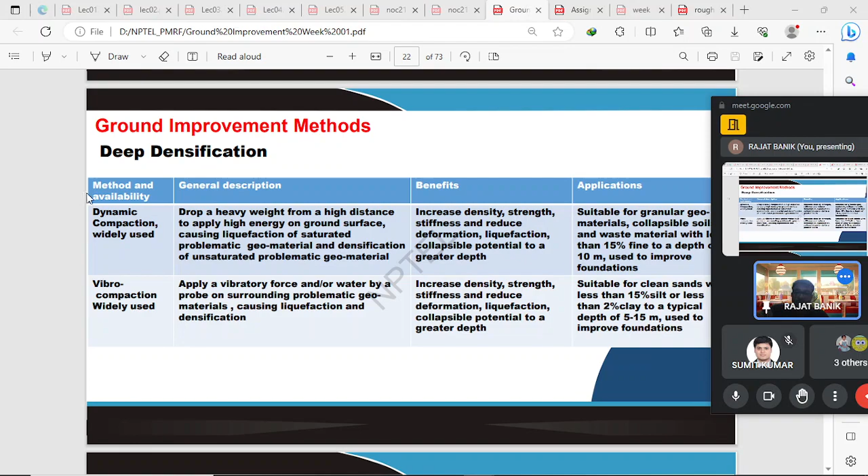Then we go to discuss deep densification. In this densification, there are dynamic compaction and vibro compaction. Both techniques are widely used for a wide range of geomaterials and problematic soil, at quite deep depths, like 5 to 15 meters. We also discuss sand compaction columns and stone columns, which are widely used mainly for drainage or consolidation, accelerating consolidation and drainage by pumping out water from the groundwater table, lowering the groundwater table. These are used at high depths, 5 to 15 meters, sometimes up to 30 meters.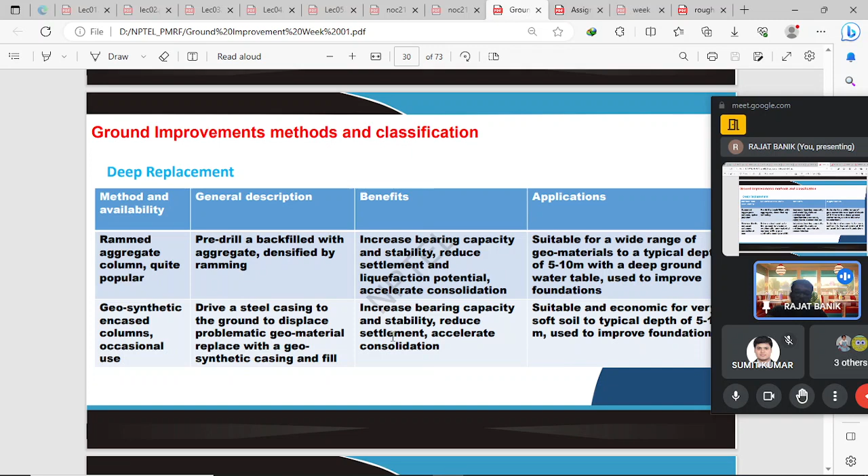Further, we discuss the RAM deep replacement method, where we replace the soil at greater depth. Here we discuss the rammed aggregate column and geosynthetic encased column, which are not usually used or quite popular, only sometimes used. The improvement depth is 5 to 10 meters in both cases, and they are used mainly to accelerate the consolidation process.

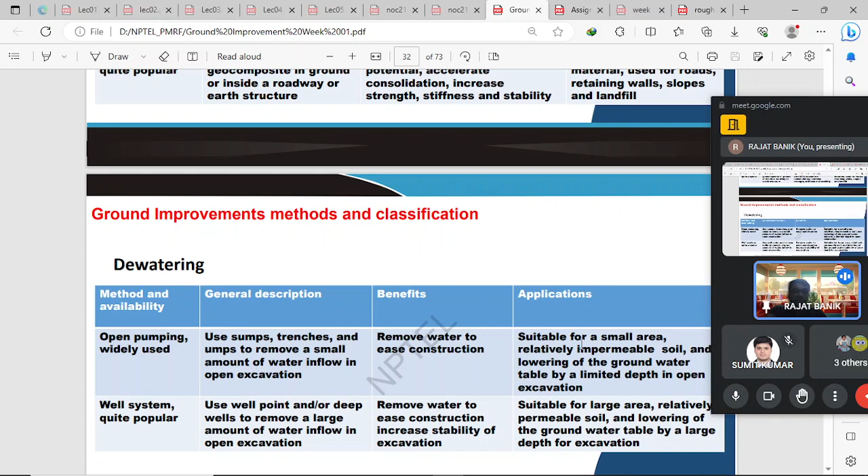Then we discuss drainage classification. Here we discuss two methods: field drains and drainage with geosynthetics. In field drains, we use them to accelerate and reduce water pressure, accelerate consolidation, and increase stability, effective stress, and bearing capacity. We can also classify this by dewatering, using open pumping or well systems. In open pumping, we pump out water and lower the groundwater table. In well systems, the same thing happens but at larger depth. Both methods are suitable for dewatering at the construction site, but open pumping is used only for small areas, while well systems are used for large areas.

Then we discuss the consolidation method. Everyone is well aware of consolidation. Here we use two techniques: fill preloading and vacuum preloading. In fill preloading, we apply a surcharge load for a duration, causing settlement and stabilizing the ground, reducing future settlement. The same thing happens in vacuum preloading, except instead of surcharge load, we use vacuum pressure only. The same benefits and applications apply in both cases.

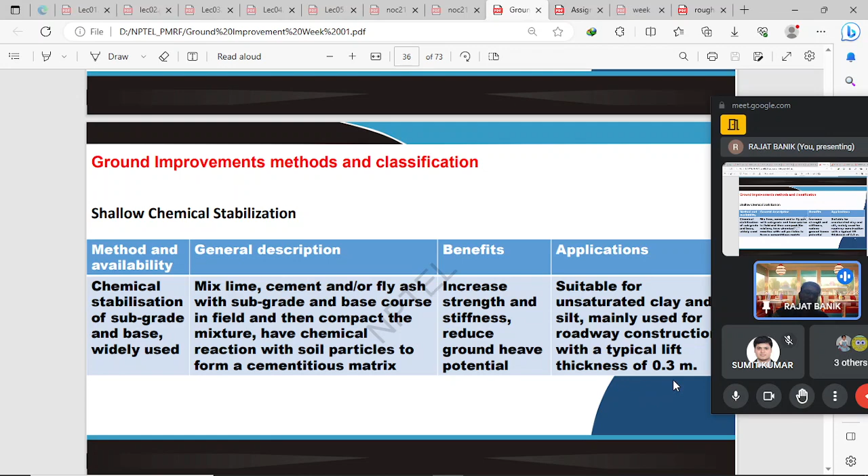Then we discuss shallow chemical stabilization, specifically chemical stabilization of the subgrade and base. It is widely used and mostly popular in road construction, embankments, etc., up to 0.3 meter thickness, only improving the soil at that depth.

Then we discuss deep chemical stabilization, which is nothing but the grouting technique and deep mixing. In the grouting technique, we inject grout at deeper depth using a vertical probe or injector. The same happens in deep mixing, where we use a mechanical blade. In both cases the benefits and applications are the same. Both are mostly used for protective purposes, to protect existing structures already built, or to remedy the structure or improve the soil.

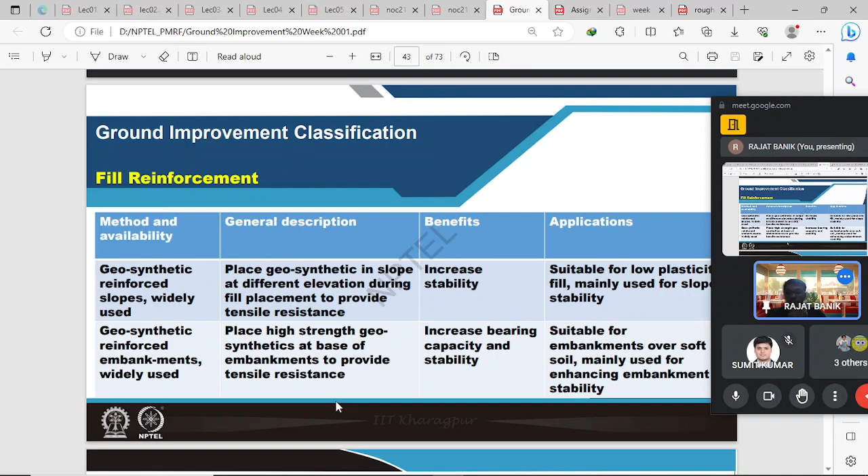Then we discuss fill reinforcement. Here we discuss geosynthetics, reinforced slopes, and geosynthetic reinforced embankments. Then we discuss mechanically stabilized earth walls and geosynthetic reinforced walls, etc.

At last, we elaborately discuss how to start the ground improvement technique, whether it is required or not, what type of tests are conducted, when it is required, when it is not, and why or why not.

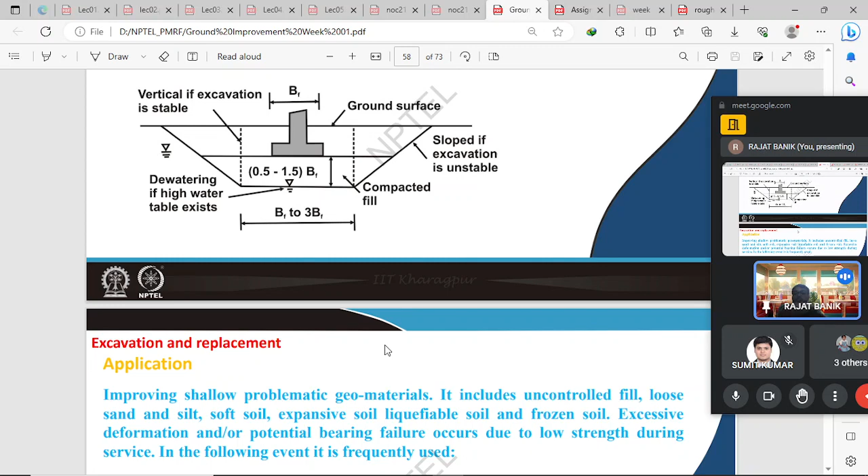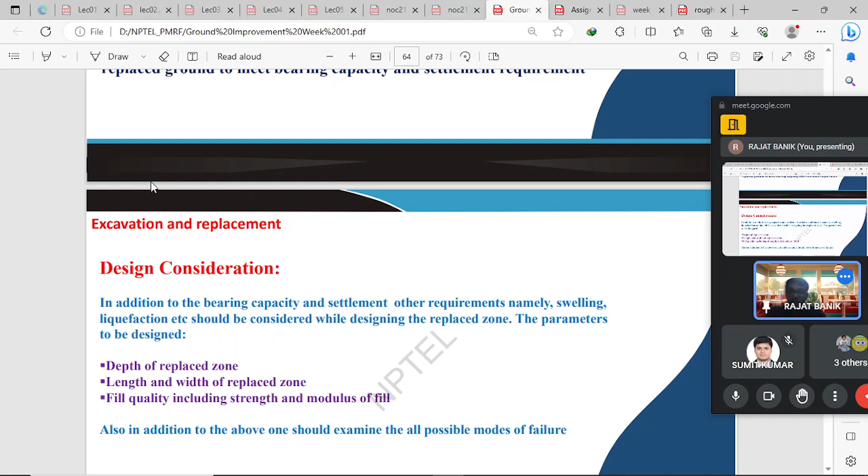Then we discuss elaborately the excavation and replacement method: when it is required, how much depth and width are required, the effect of the groundwater table on this method, its disadvantages, limitations, and suitability. We also discuss the principle it is based on, and the design criteria - how much depth, length, and width are required, and what type of material is used. We also discuss the different failure modes - four types: general failure, punching failure, distributed failure, and punching failure with reflection into the underlying weak soil.

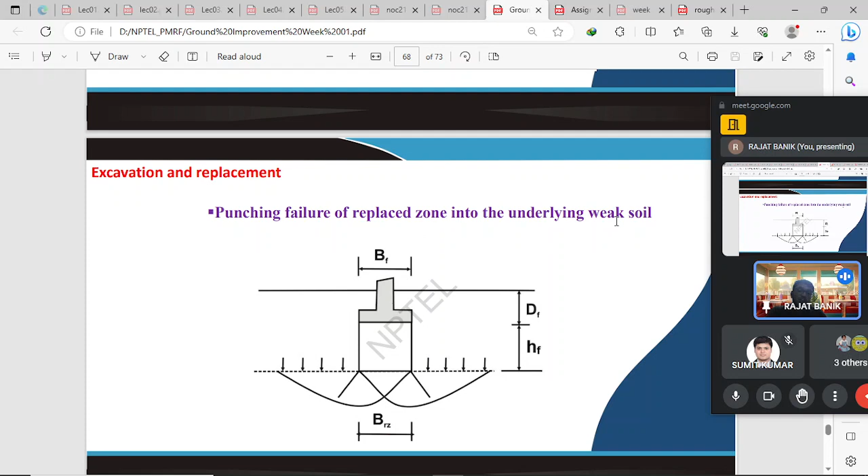Then we show the bearing capacity formula and discuss the shape factors for different phi angles. So, like that, we conclude here.